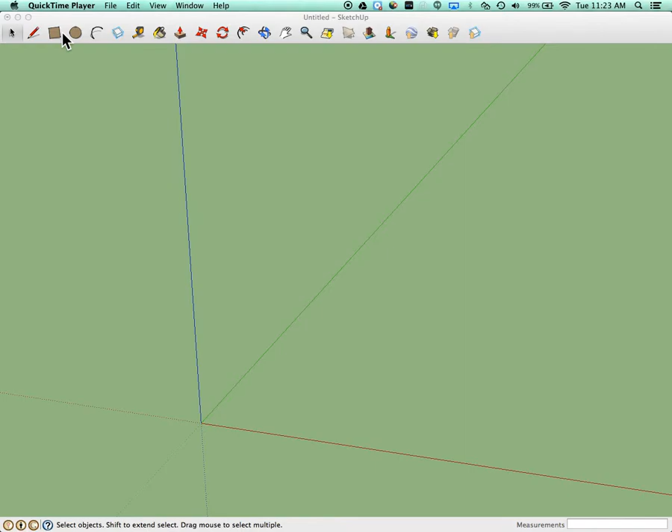So what we're going to do is take a look at the wired baskets. I'm going to select my rectangle tool, click on the origin, and create a rectangle. I'll add a size in the corner by typing 2 quotation, comma, 2 quotation, return. That's why it got a little bit smaller.

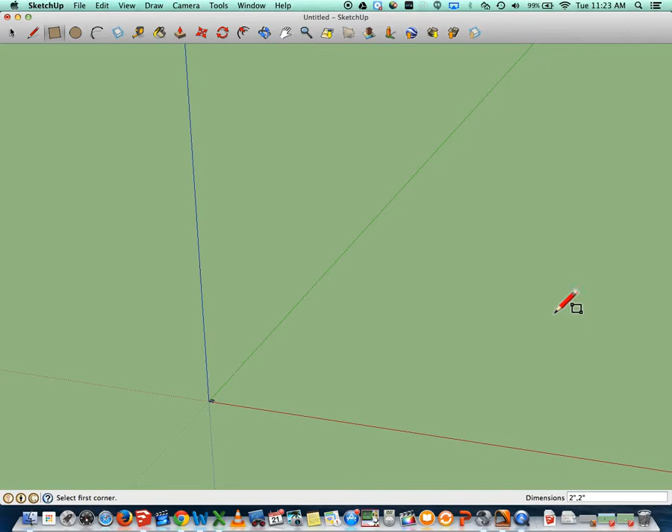Okay, so I'm going to go ahead and zoom in. I'm going to push-pull my square into a cube, going up 2 inches. Okay, and I'm pressing return.

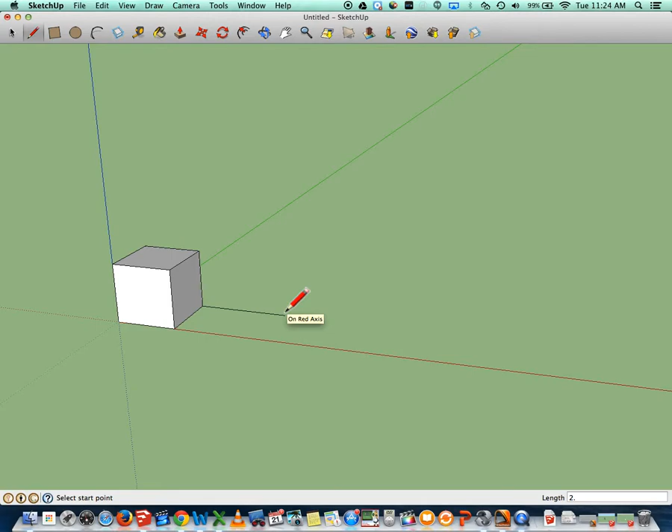Okay, the next thing I'm going to do is select a line tool. Then I'm going to drag out from the corner, and type in 2, I don't know, 0.5 inches. The length of that line is less important.

In the directions, it does ask you to make this cube a component. So I'm going to select just the cube, not the line, and say make a component. I'm just going to give it a name, box, and press create.

Okay, the next thing I'm going to do is use my rotate tool. I'm going to select my rotate tool. Coming down here to the end of the line, I'm going to click to place it, and it'll say 'at endpoint.' I'm going to click, and now I'm going to drag.

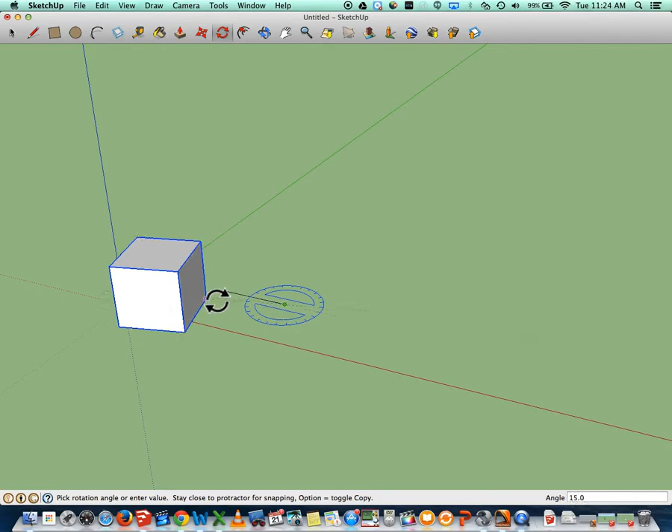I'm not holding down the mouse button, I'm just moving the mouse, that dot to the corner of the cube, and I'm going to click. You'll notice it pulls away the original, but I want to make a copy. To make a copy, I press the Option key, and now I have 2. It tells me in the lower right corner what the angle is, and I'm going to type in 360 and press return.

Because I want it to go into a circle. Now there are 2 cubes right there, but you can only see 1. So what I'm going to do now is divide out the space between all of them by typing in how many copies I want.

In the instructions, it tells you to use 10 copies. So I'm going to type in 10 and then divide by, and press return.

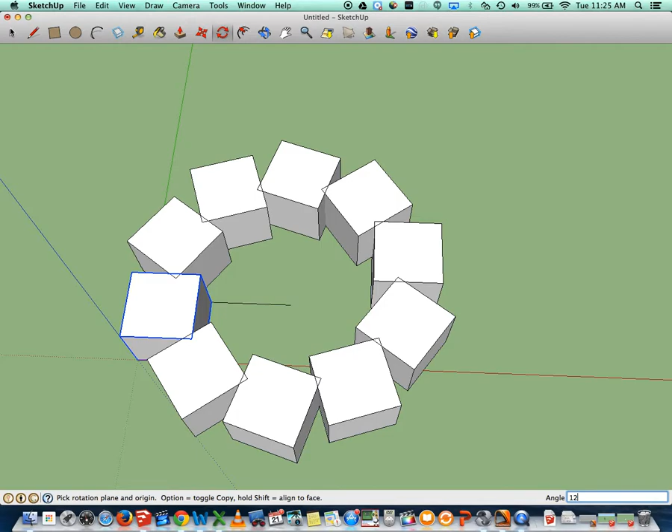I can see from here they're overlapping a little bit, but not very much, so I might want some more. Okay, I might want 12 copies. 12 divided by, and I'm going to press return.

Okay, the trick to doing that is you have to do it right away. So now I can see that these are all overlapping, and they look like they do in the packet.

So I'm going to select the erase tool, erase this little line. Remember, there are 2 boxes right here, my original, so I'm going to delete one of them. If I delete the other one, it goes away. Apple Z, undo. All right.

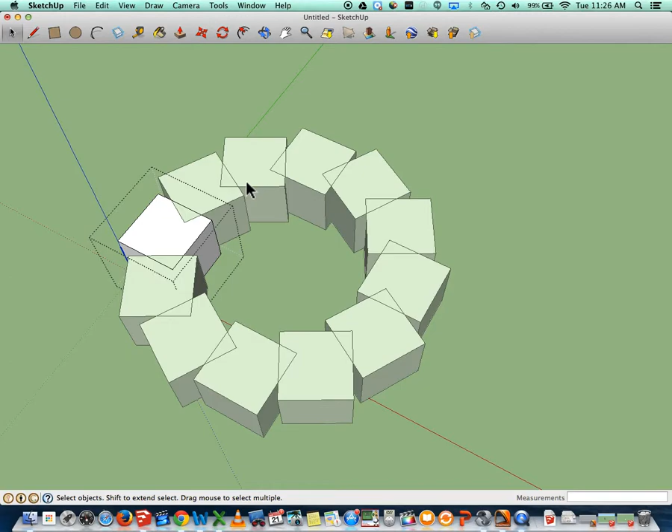So the next thing it asks me to do is to hide these other components. You should be able to open one, and the rest of them will hide. You can see in this instance they're dimming. If you go up to Window, Model Info, you can say hide the other components when you open one to work with. Okay?

So again, when I click off of it, they come back. So I didn't delete them, I'm just hiding them. And I can click off of it.

All right, the next step says to open the original component, select it all. I can see that all the sides of the cube are selected. Now what it wants me to do is intersect the faces with the model. What that means is anywhere this cube touches this cube, or touches the original, it'll create lines where they overlap.

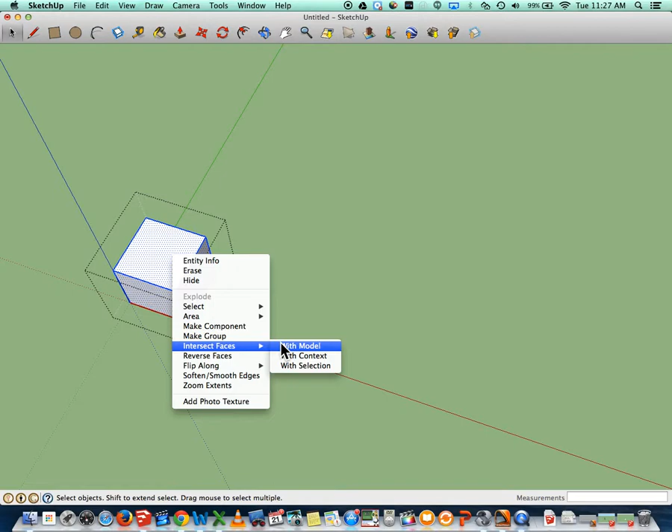For example, I select it, right click, intersect faces with the model. And you can see now I have these little lines on the side here and on the other side.

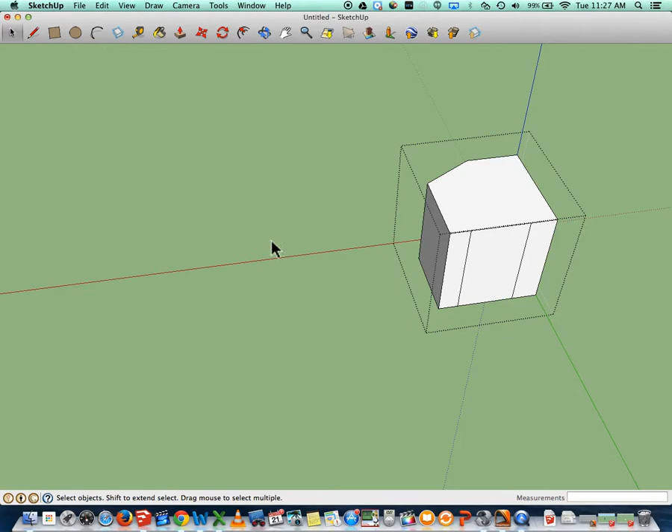In the instructions it says on this side here, draw a line from the top edge to the top edge, and then you can push down this side over here. If I closed it you could see what it looked like. There's one more thing we want to do: erase these 2 lines right there.

The next thing we're going to do is add a line or a tube that connects from the outside from here, arcing over to this one over here. So this is what it will look like.

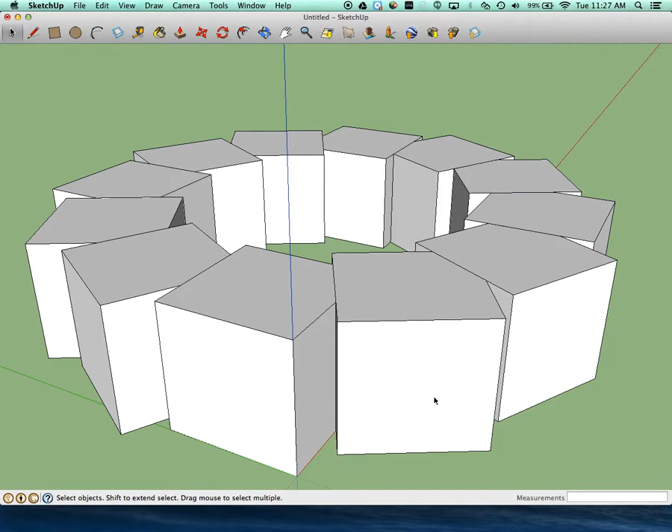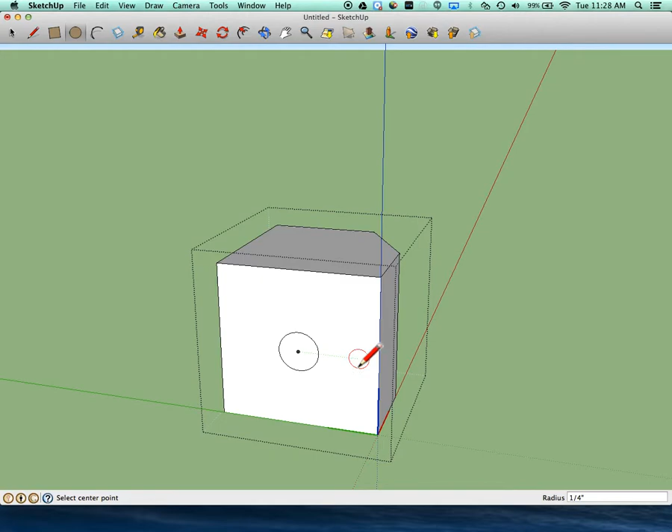I'm going to create a circle. Let me reconnect. I'm going to use my circle tool, but I have to open this component first. Using the circle tool, I'm just going to randomly select some part where I think it's in the center and draw a circle. I'm going to do a 1/4 inch. If I click off of it, you can see that circle went to the rest of the components.

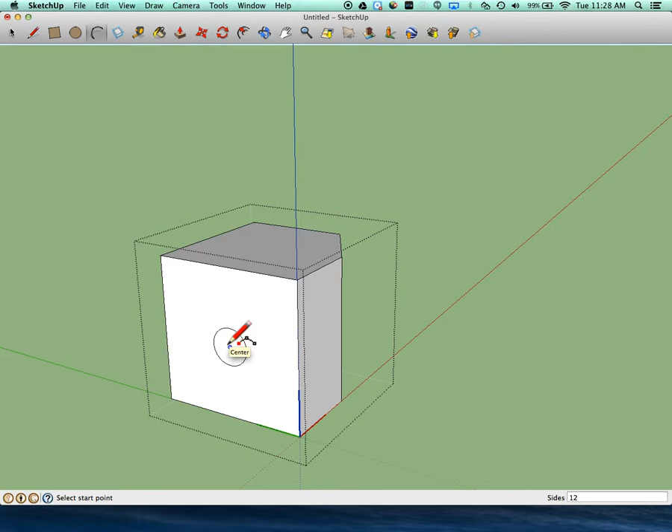The next step is to use the arc tool. Here's the trick to finding the center: if you just go into it, it might not go to the center, but if you touch the outside of the circle and then go to the inside, it'll say center. Oh, but I do need to see the other side.

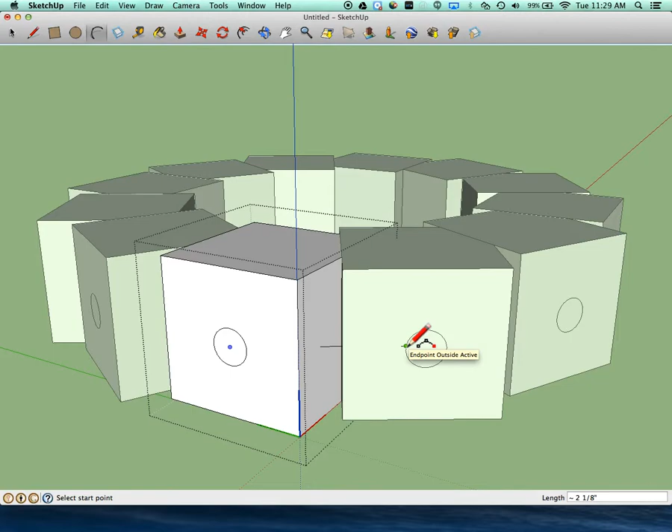So I'm going to go Window, Model Info, and unhide the other ones because I need to draw that arc from center to center. I pause right here at the edge, going in, rotating above or below so you can see how far out you want to do a half circle. Now you can see that half circle got created on all of them.

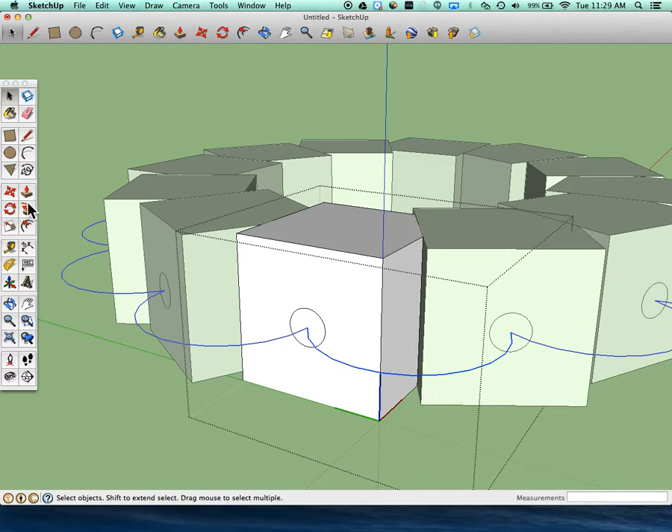The next thing you're going to use is the Follow Me tool again. Before I use that, I click on the arc, then click Follow Me, and then click on the circle. When you do that, the tubes will connect on all the rest of them because it's just copying the component.

Okay, same thing. You're going to draw a circle to make the wires in the top. Click on the corner. Again, I'm going to use 1/4 inch because that's what I used on the side. And then I'm going to use my arc tool, clicking in the center of that circle, pausing at the outside edge, and then go to the inside.

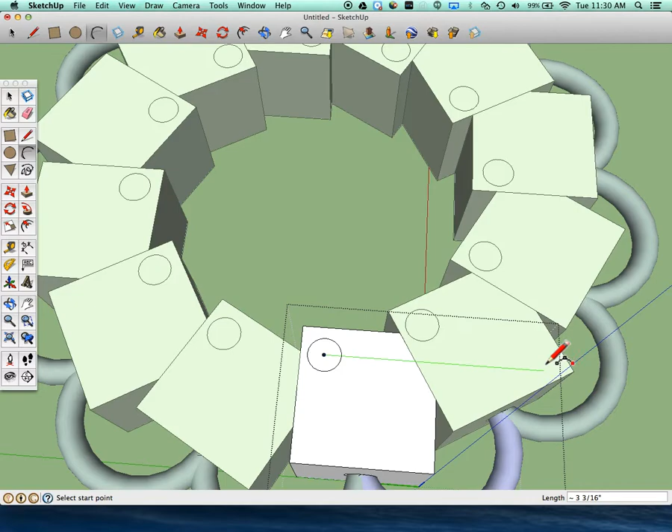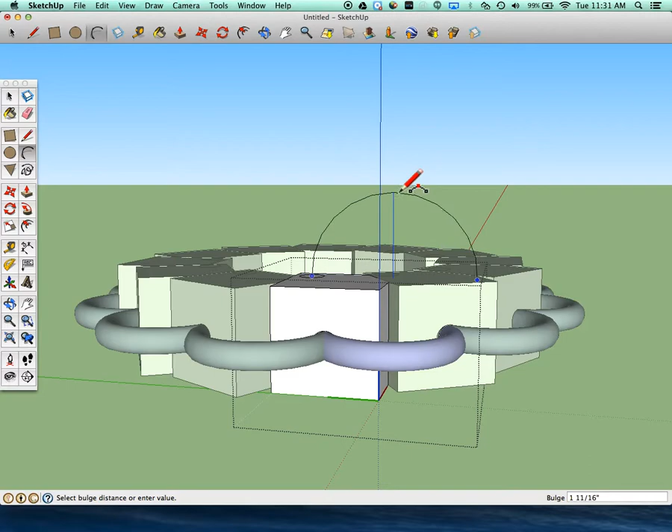Click, okay, and then drag across to the next one, to the far corner here, and try to stay inside so I'm coming up to get a half circle. There it is, half circle. It took a little bit to find it, and I click.

I'm going to select that arc, and then with the Follow Me tool, I'm going to click on the little circle, and now it arcs up and around to the others. Now what's left is to color it.

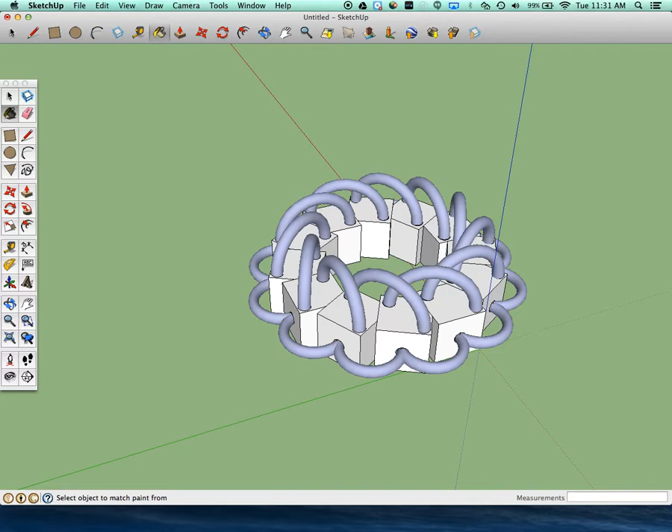If you color outside of the component, with the component closed, you'll color each one individually. You can see because the component's closed, each one's coloring individually.

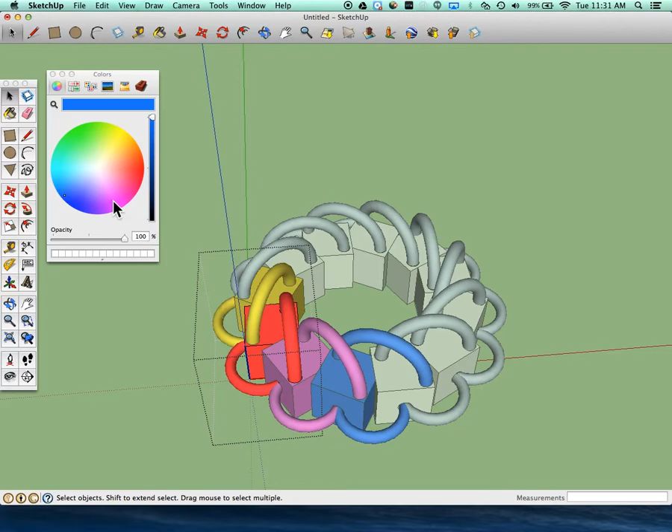If I open a component and then select the color, this one is the one that's open, you can see the top edge of all of them just turned green because the components are copies of each other. If I select this arc as well and click on the pink one, because that's the open one, you can see they all take over that color, because I'm editing the component rather than the individual one.

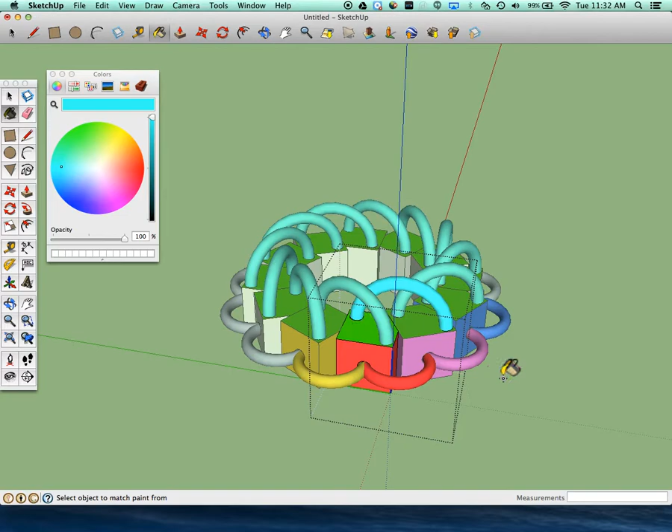And the instructions do ask you to color your components individually, so you want to close the component and then color them from the outside. I hope this helps. The wired baskets.